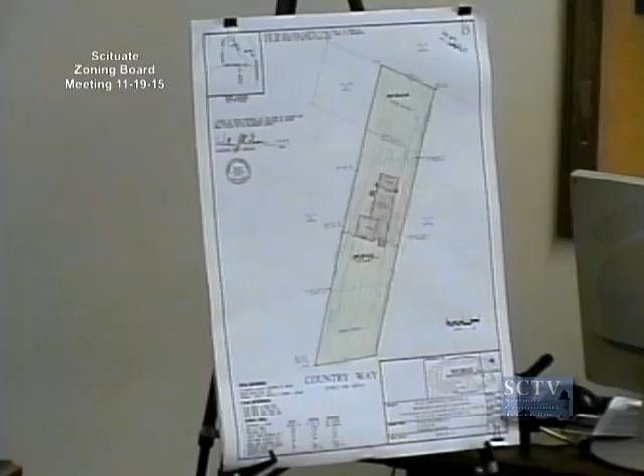Thank you. We have a deed, right? No. Do we have a deed? Yeah, the applicant—we do have a deed, Frank. Yeah, the applicant, he actually signed the application.

So he is the applicant, and he's usually with his engineer—is that necessary to have a letter? If he's the owner of record, no. Are you the owner of record? No. Oh okay, is that what you're asking? That's my point, I thought you wanted to authorize the engineer.

No, God no, I want the owner of the property to have authorized Welby to do what they're doing. I'll authorize him if that's what—no, the owner needs to be identified.

The owner, according to the deed, is Marzilli and Dolan. We have a purchase and sale agreement. Give that to Annie. That deed will work—you can white out the financial information if you want. Sure, but just give that to Annie. Okay.

Just for clarification, the garage and the two sheds in the back are going to be removed? Yep, all the existing sheds that are non-conforming structures are also going to be removed. Correct, all the existing structures are going to be removed.

Is there a septic system proposed on site, or sewer? No, it's not sewer, we have to perk it. I don't know if it's a septic system or a cesspool, but it will have to be upgraded. There's a failed septic system on the site right now.

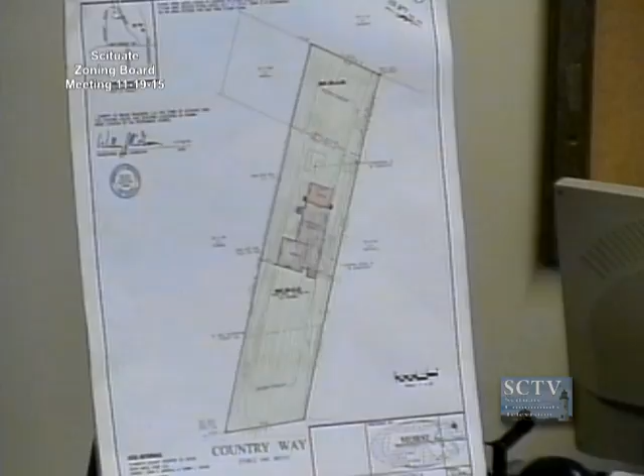Depends on the soil. Anthony? No, okay. Anybody in the audience have any questions or comments?

Yes sir. I was going to ask, my name's Jim Critchley, I'm an abutter at 585 Country Way, to the right of that lot. And I was going to ask about the location of the septic system, because this property has a failed septic system, which was a big annoyance when it failed.

I wanted to ask what kind of septic system would be going into this property, and if somebody could tell me where that would be located. I guess that's a question for the builder.

Well, it's really a Board of Health question. There'll be a hearing in front of the Board of Health to get it approved. You'll get notice for that? Yeah, as an abutter you'll get notice, there'll be a Board of Health hearing in which they'll have to present a plan, which will outline what the system is, where it's located, how the lot perked.

So if you have any concerns, I suggest you go down the end of the hall and look at their plans before the hearing, or ask the builder. I'm sure he'd be happy to tell you when they figure that out, but they haven't gotten to that point yet, as I understand it. And I can tell you, it'll be a much better situation, and you'll probably never know or smell anything going forward.

Anyone else? Yes ma'am, my name is Kathy Downey, I'm on the left-hand side. My concern is the house is going to be moved considerably closer to my home than it is now, and the size of the structure is more than triple the size of what's currently there, and is going to be right on top of my house.

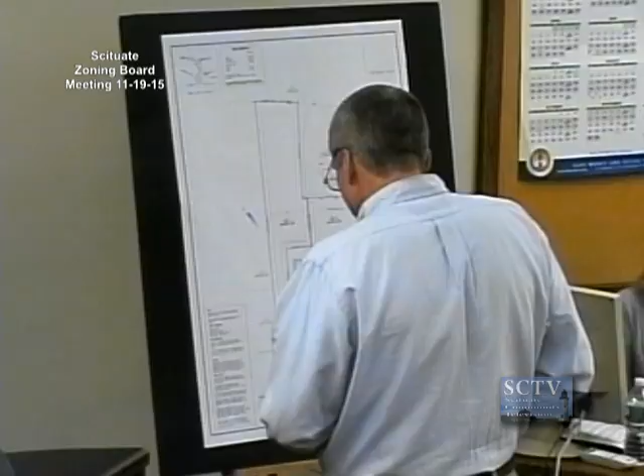Okay, we're gonna need that added. We have had the property inspected, and there are no wetlands. We just need to have it certified on the plan that it is all uplands. We can do that.

Where the dwellings would be proposed to be constructed, there is 125 feet of lot width. And with that, I'd like to have Brendan lead you through the plan, and then we can answer any questions. Okay, just a quick question to Mike.

So it sounds like up where the writing is, Lot 1 and Lot 2, that area is the proposed area with 125-plus lot width, is where you're proposing? Yes, where those lines are drawn. Yeah, we need this area here. Okay.

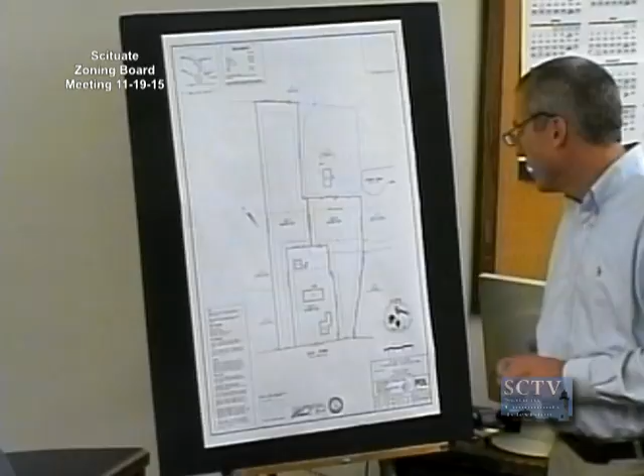So as Mike has said, the existing lot is comprised of just over 3 acres, and we're creating the 2 fifty-foot lots, which have lot frontage greater than 50 feet and a lot width greater than 125 feet from the frontage to the building area. And we're also creating the conforming lot, which contains the existing house, barn, and accessory dwelling, and also the required lot width as well. I think that's about it.

The only other thing that I want to mention to the board, and I have copies for the file, is that the house lot, Lot 3, contains the existing dwelling, an existing barn, and a small cottage. We were in front of the planning board last month, and the planning board approved that as an accessory dwelling.

Okay, so in discussion and consultation with Neil, obviously we went to the planning board first because we didn't want, if this is approved and then once the Form A is approved, to create an illegal lot, which would be the house lot with 2 dwellings on one lot, so.

While the house lot is not part of this application, I just want the board to be aware that that was our first step in this process.

And you're keeping the 1749 house? Yes, absolutely. My mother would be rolling over in her grave. We don't want to do that to Mom. That's good, we see so many of them lost in Scituate. It's a very attractive property, and that house is under agreement for sale to a person who grew up in Scituate and will be coming back. I'm always personally happy to see you keep the older houses. It's one of the nicest pieces of property in town.

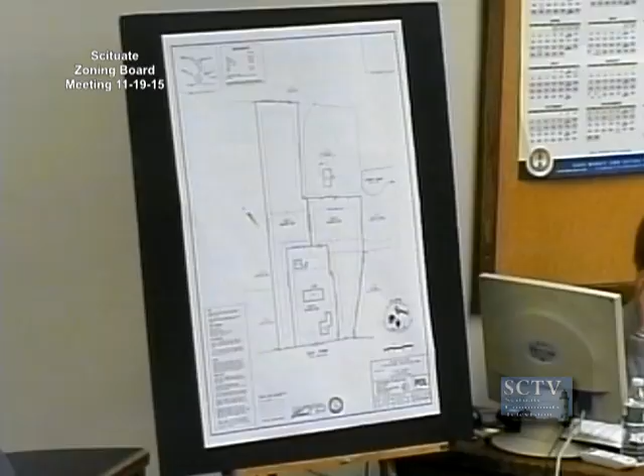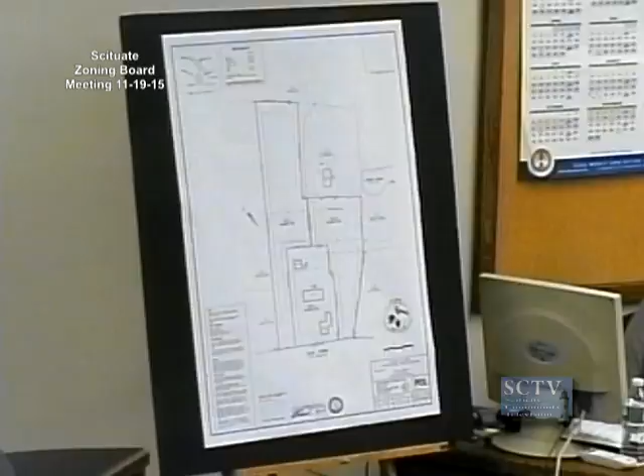I don't think I was, like I said, I thought I knew what we were doing. When was the accessory — do we know when the barn and the accessory dwellings were built?

The house was built in the 1740s, as you mentioned. We don't have an exact date on the barn or the cottage, but recalling some historical photos and maps, we suspect the barn was probably built in the late 1800s. A neighbor who grew up in the area and has since passed away recalled that the cottage was some type of accessory dwelling for farm animals attributed to the barn. So the cottage was probably the newest structure, but it's still fairly old. That was just curiosity.

Anthony? John? No, just — it sounds like you've got double the required area in each lot, the lot width is there, and just a reminder, no further subdivisions. That's on the plan and part of a deed restriction. And then, just one more time, I think you mentioned the square footage. Of the two lots? Yes. I guess it doesn't matter as long as they meet the setbacks of the houses. Right, you don't have any idea of the houses to be built, it's too soon in that process. Right now the lots, if approved, there are perk tests, more work needs to be done, but they're being sold or offered as potential builders' packages. The Lund family hasn't designed any houses or gotten septic systems approved yet — that will all be after we're through this process and the planning board on the Form A plan.

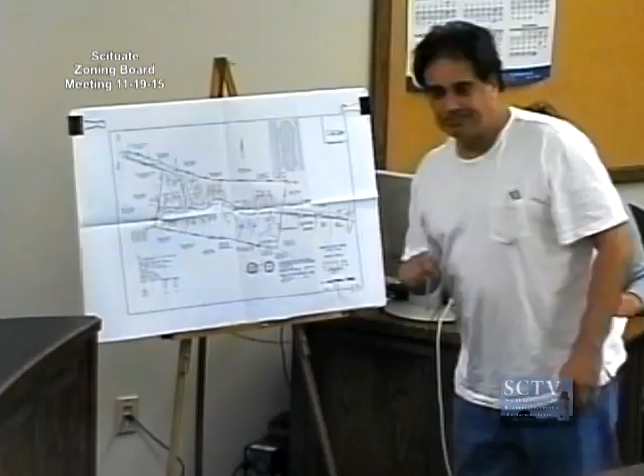With me representing Walden Woods LLC is Mr. Paul Morocco. Mr. Paul Morocco has been on-site supervising the construction of the Walden Woods development. I'm here before you tonight to request a minor change to the comprehensive permit, which is basically a couple of changes.

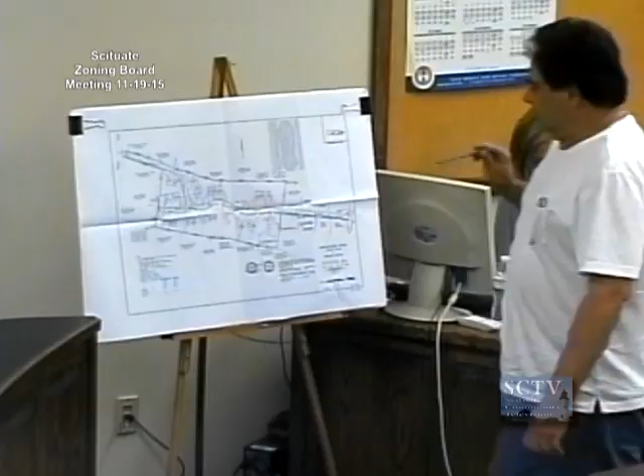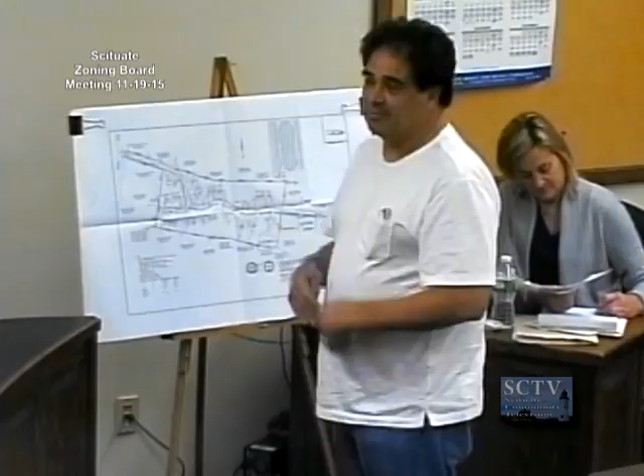The record plan that you see here proposed a sidewalk from Tilden Road to Hazel Ave. The purpose of that, during the prior ZBA hearing, during the permitting of the project, is to allow public access from outside the development to use this area to walk, to get to the waterfront of Scituate via walking. I mean, the waterfront is down there, but good exercise.

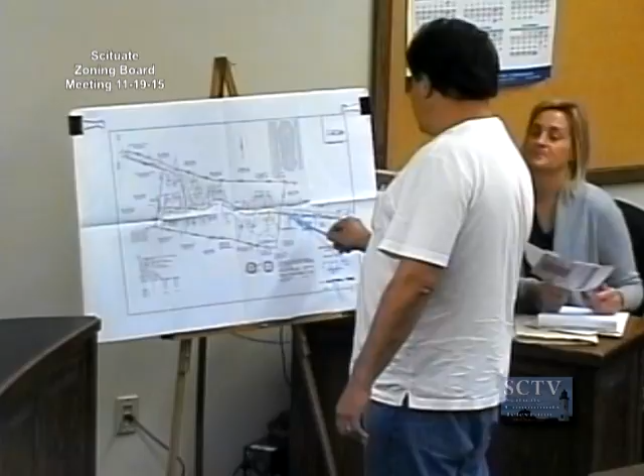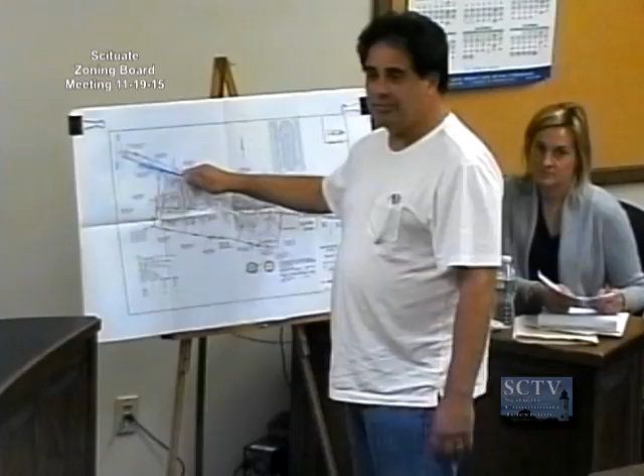Anyway, a sidewalk was proposed along the property, the former property of the Grimes, now owned by Mr. Morocco as well, through the development, a short spur here on this dead end, and all the way through Stenbeck Place. The previous proposal had, I believe, a 4-foot sidewalk with a bituminous berm along the formerly Grimes property, and then it extended all the way out until we got to these 2 visitor parking spaces here.

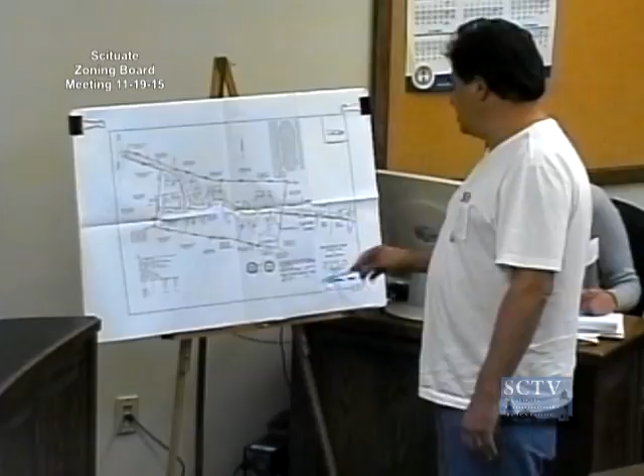Then the proposed plan during the permitting process was a 5-foot sidewalk and a 2-foot grass strip, continuing on through the development until it got to Stenbeck Place, where the approved plan proposed a 4-foot sidewalk with a grass strip along Stenbeck Place.

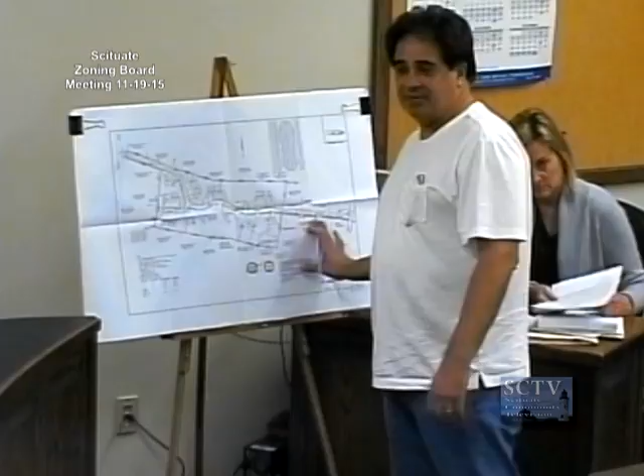What Walden Woods is requesting is that we eliminate the grass strip on both the development and Stenbeck Place, and reduce the sidewalk width from 5 feet to 4 feet within the development.

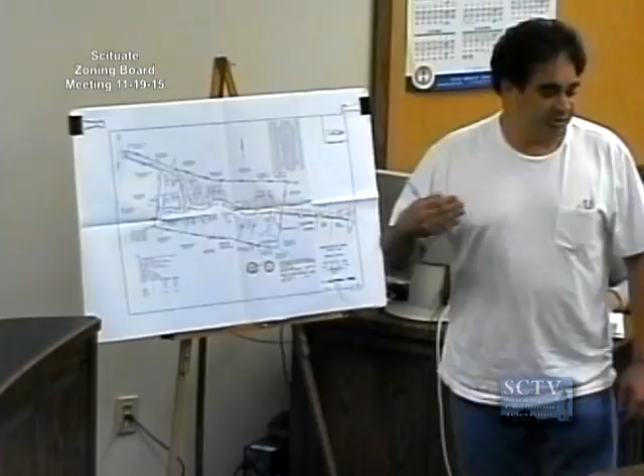Now, I'd like to tell you a story of one of the reasons Mr. Morocco is requesting this. Mr. Morocco and I did a development together in another town, and we had pretty much the same thing: we had the grass strip, we had a proposed sidewalk.

And when it came time for Mr. Morocco to provide the sidewalk for the development, a number of units were sold. And as I was laying out the back of the sidewalk in front of the sold units, I was, pick out a word, confronted, if you will, about the location of the back of sidewalk to each of the units by Mr. Morocco's buyers.

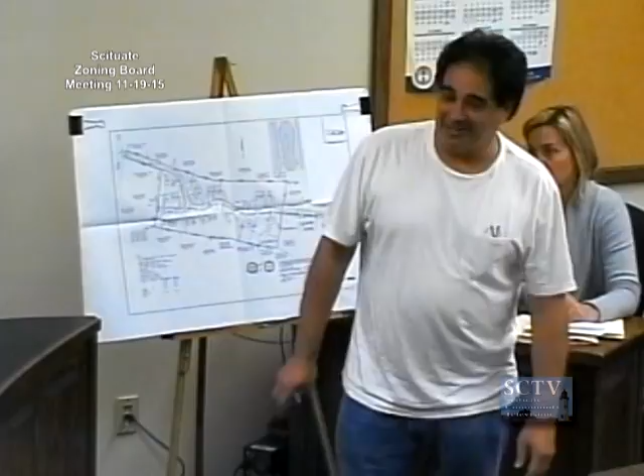So we asked the town, another town, if they had any issues with removing the grass strip to move the sidewalk away from the units, give them a little bit more lawn space, give them a little bit more privacy.

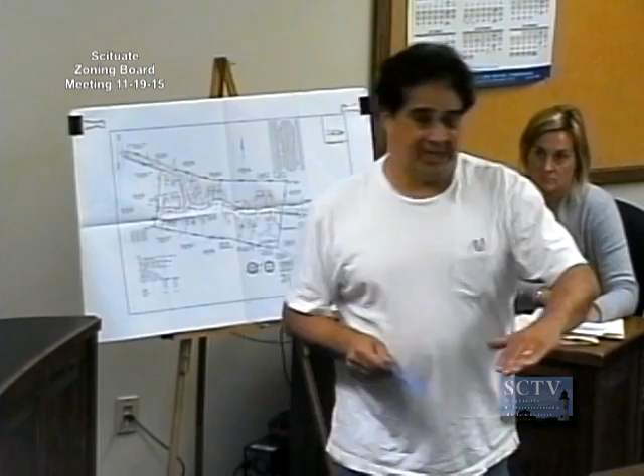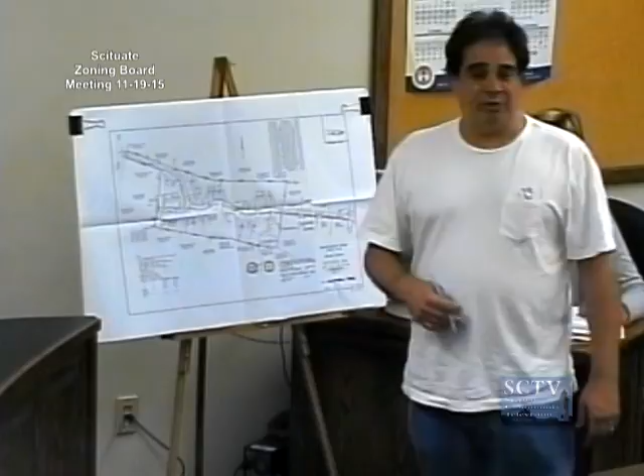The caveat to this is that the proposed plan proposes Cape Cod berm, which is a little 3-inch berm, sloped up. With the recommendation of Amory Engineering, which is the board's engineer on the project, Mr. Morocco is also requesting that the Cape Cod berm be revised to a 6-inch bituminous berm, which I believe you may have a detail in your package that shows this.

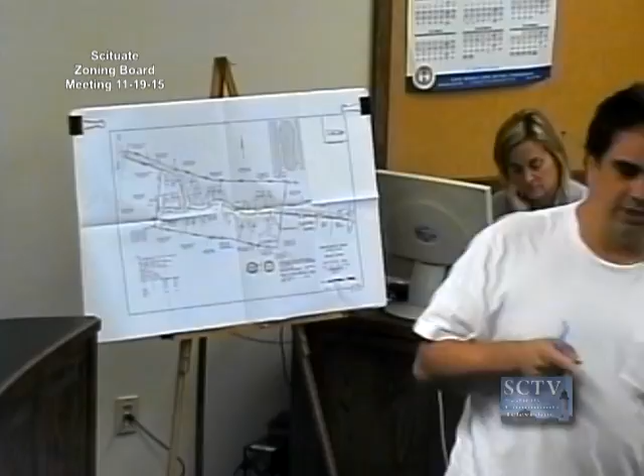This will add safety because of the sidewalk's proximity to the travel way. So rather than having small 3-inch berms in front of the sidewalk backing into it, eliminating the 2-foot strip, we feel it's a safe trade-off.

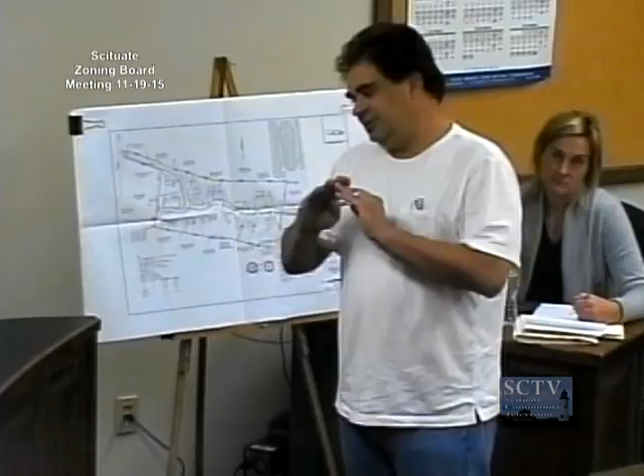Get rid of the 2-foot grass strip, get the sidewalks away from the units, give the homeowners a bit more lawn to play with, a little bit more privacy, since we're opening up the development—unlike a lot of gated communities—for other people from Scituate to walk through on their way to the water. This would be a benefit to the town to grant these changes.

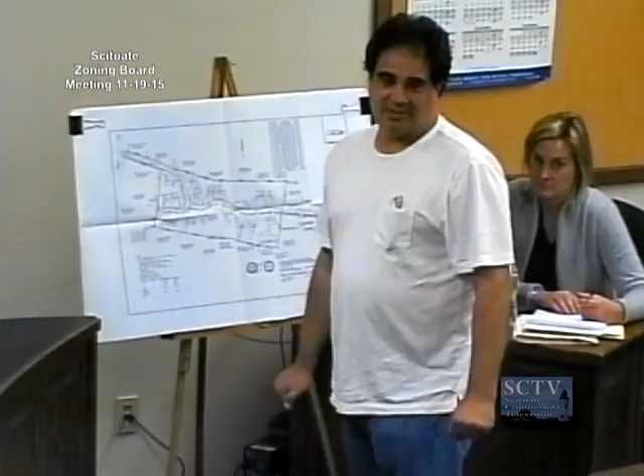Questions? Well, I have a lot of questions. So where on the plans, because this plan that you provided, dated October 30th, 2015, does not show details of the original layout, I mean of the sidewalk, the width of the sidewalk, that it changes.

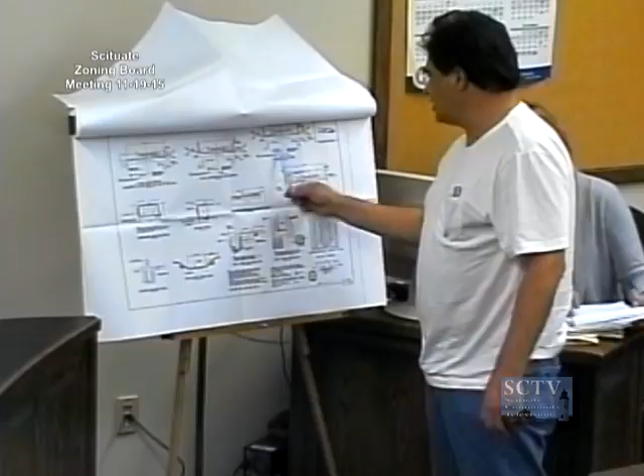Well, you'd have to go to the... did I provide that in the package? I'm sorry, that number, some of it I can't read and some of it I just don't know what I'm looking at. There's a problem. I had made prints of this off of the Registry of Deeds website, so the clarity's a little off. You can kind of make out a 4 here.

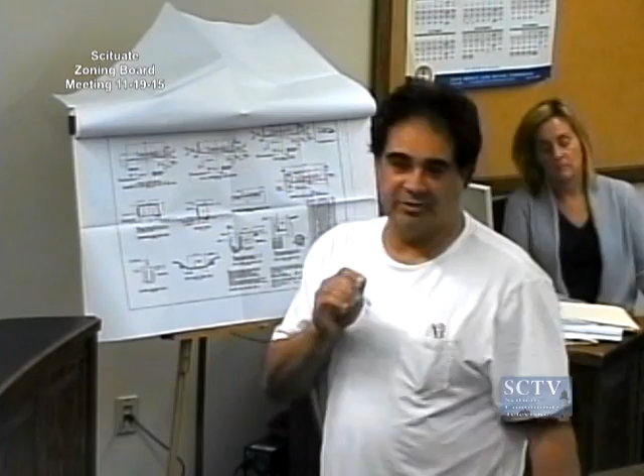Now there is another benefit to the homeowners on Stenbeck Place with the reduction and the removal of the grass strip. Some of the owners have built in the Stenbeck right-of-way — fence posts, picket fence, some landscaping. Mr. Morocco would like to limit the amount of disturbance to the neighbors when he puts his sidewalks in.

We specifically, the resident at the corner, say the southeast corner of Stenbeck and Hazel, there was a fence with some landscaping behind it. If we were not to grant the change, Mr. Morocco would have to move their fence, replant their landscaping, and put in the sidewalk.

Okay, you can move a fence, but sometimes the landscaping doesn't cooperate if you plan. Is this new landscaping that they put in?

You saw it. Hi, Paul Morocco, Walden Woods, good evening to all. The plantings have been there for quite a few years.

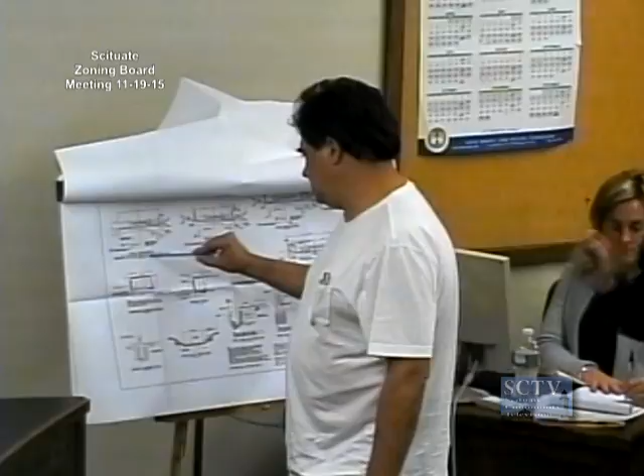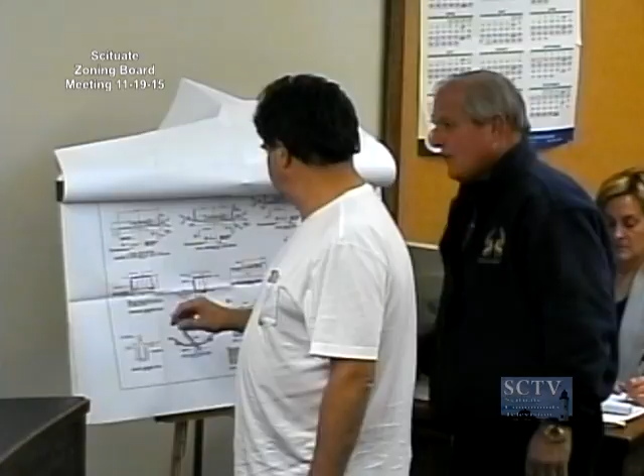Excuse me if I may — Paul Morocco. Stenbeck Place is a 4-foot sidewalk that's been approved. Stenbeck Place is a 4-foot sidewalk, and then from the beginning of Stenbeck to Rachel's Way, it's a 5-foot sidewalk out to Tilden Road. So Paul, this whole Stenbeck is 4 foot? Correct. And then through your project, all the way to Tilden, is 5 foot? Yeah, proposed 5 foot. Okay, I misspoke on that.

Okay, you did. The grass strip was not proposed along this stretch because of its proximity — where are we? Right here. It was not originally proposed in this location due to the proximity of the stone wall that separated Grimes' property. And also along here, it's all 5 foot, he said.

Yes, but the grass strip is not shown here. It's not shown here — where? On the curve, the grass strip's right there. This is on the original plan that he also provided us with the packet. So this is the original plan, the approved plan.

That's what the grass is? Strip, oh okay. You can see the grass strip here, and you can see the grass strip around here. It's not shown here because of that stone wall, and coming around the curve it wasn't included in the curve previously, but it does pick up here after these 2 visitor parking spaces.

Okay, and you referenced that in your presentation. These 2 parking spaces — those aren't visitors, those are for the house. So that's for this property, this one is here. These are the visitor lots.